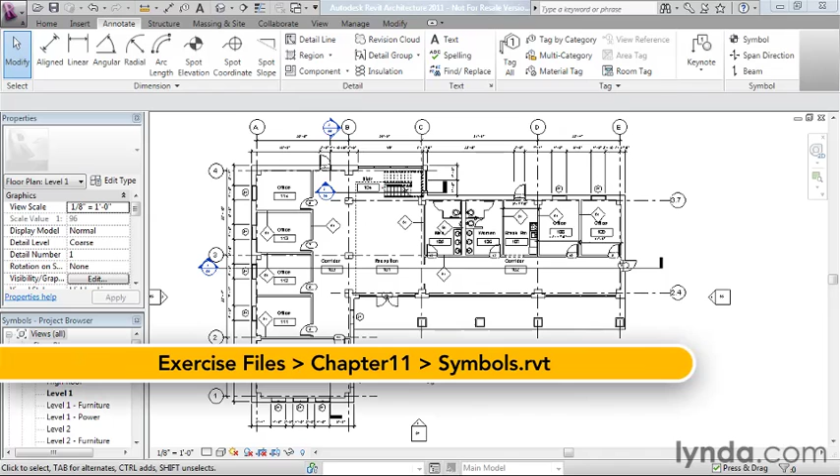Construction documents incorporate many kinds of symbols. Revit has dedicated tools for text, dimension, tags, and keynotes. For any other kind of symbol, we can use generic annotation families. Such families can represent any symbol we require.

Let's go ahead and have a look. I'm in a file called Symbols, looking at a first floor plan, and we have a couple symbols that are already in the file based on the template that we started with. On the Annotate tab, way over at the right, we can find the symbol tool. As I said, these are just generic annotation symbols, and there's a couple of them loaded in here. Let's start with a north arrow, pretty simple north arrow. You can just kind of place that somewhere down in the corner of the drawing.

Now, if I click on it, you may be expecting the north arrow to actually know what direction north is, and that wouldn't be unreasonable an expectation for somebody using a program like Revit. But it turns out the north arrow is just a generic annotation symbol. It doesn't actually have any quote-unquote smarts built into it. So you literally have to select it, go to rotate, and then put in some sort of an angle for whatever north is. Let's say north was at 20 degrees. We just put in 20 degrees and press enter.

Now it turns out that when you click the symbol tool, there's actually an option where you can check to say rotate after placement. That takes you right into the rotation option after you place the symbol.

Okay, let's look at another example. Let's look at the center line symbol. Really simple symbol. I'm going to place it over here, up towards the top of the plan. Click Modify, zoom in, like so. So we've got these two dimensions here, where it's an equal dimension. Let's go ahead and select this symbol.

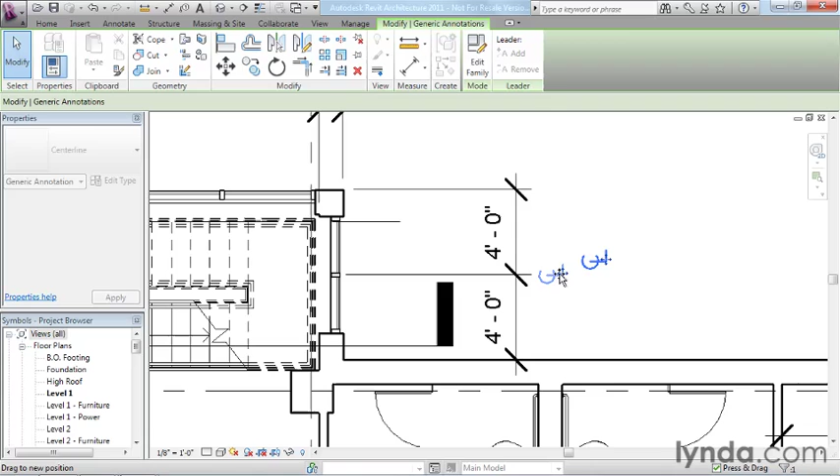We'll click Rotate again, type in 90 degrees, and then use the little move handle that's on there and just drag it like so. And that tells us we've got a center line right there.

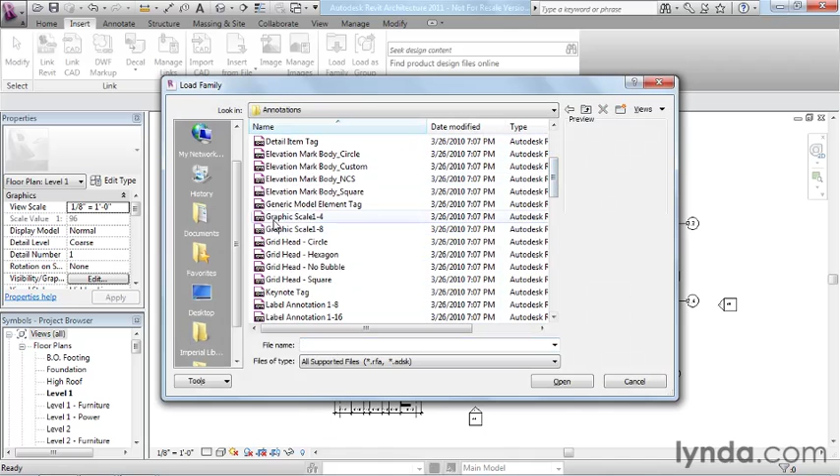I'm going to do ZF for zoom to fit, so there aren't any more currently in this project. So we'll go over here to the Insert tab and we'll click on Load Family. That takes us to our library folder like we've seen in previous movies. And I'm going to go to the Annotations folder and scroll down a little bit, and we've got a couple graphic scales right here. I'm going to go ahead and choose this one, 1-8. Click Open.

Go back over to my Annotate tab, click on the symbol tool. See the graphic scale is listed there, and I'll go ahead and place it right about here. Now, it's a little tough to judge the actual scale here, but if you zoom in on this, if we were to actually measure these points, it is accurately telling us the distance.

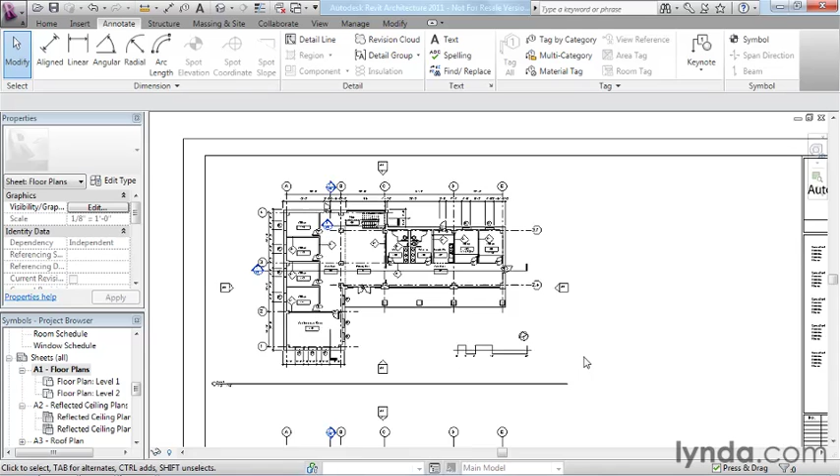I'm going to go ahead and zoom previous, and it might be easier to see if we go ahead and open up our floor plan sheet. So here's our floor plan sheet. We'll zoom in. This is our first floor plan, and you can kind of see the graphic scale there with the north arrow. So it looks a little better in context when you see it surrounded by the rest of the drawing, and how it sits on the sheet makes a bit more sense.

So those are some different symbols that we can add in to our projects. If you don't have a quote-unquote smart symbol for the task that you're trying to do, you can basically create these generic annotations, which, again, aren't terribly smart in the sense that they don't react to things or link to anything, but they do the job of giving us a symbol that we need.

There are a few other types of items that you might want to look at. We've got spot elevations, spot coordinates, and even slope symbols. No computer design program would be complete without the ability to add various symbols required by architectural documentation, and Revit is no exception. In this movie, we saw just a few simple examples of the symbol tool in action, and we can use those to put the finishing touches on our various drawings and plans.